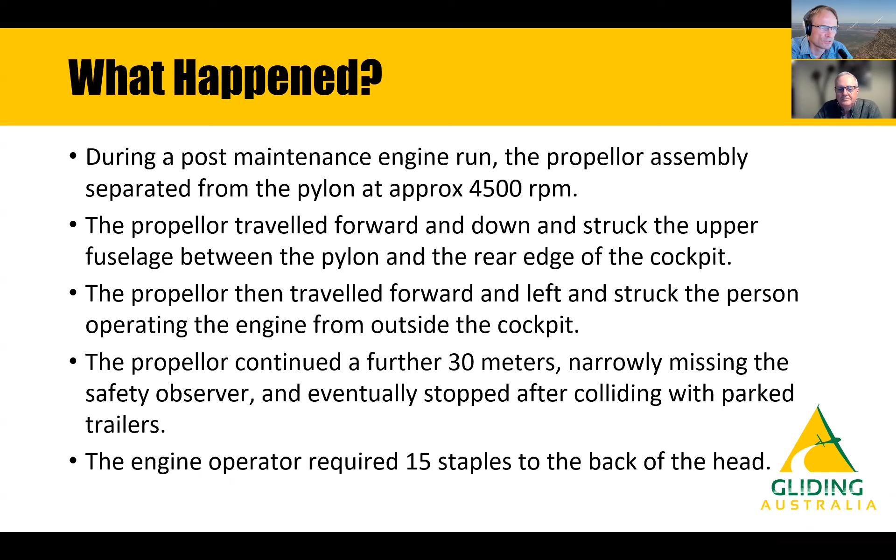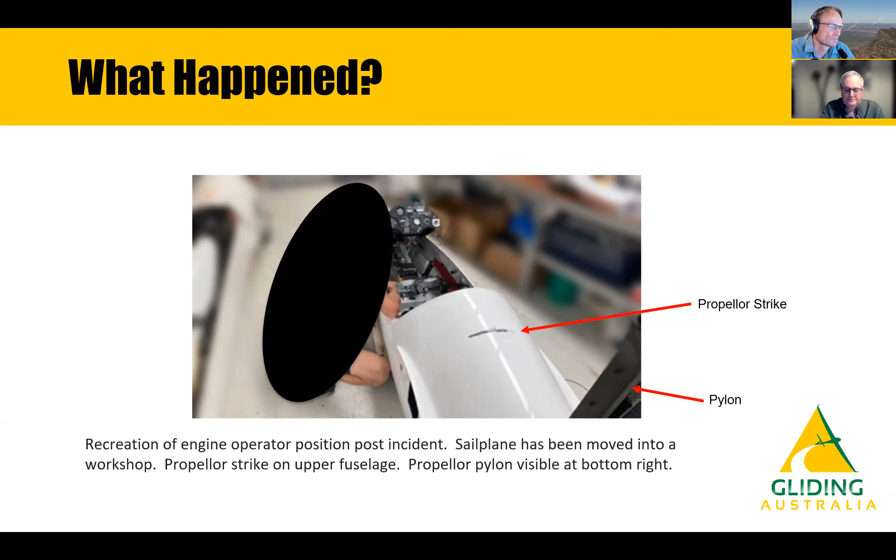So the longer sequence of events.

Not much I can do about the hum at the moment on the microphone, guys, just in the chat.

The propeller had damage from the propeller yoke, which is used to fold the prop during retraction. This is a sailplane where, when the propeller is retracted, the upper blade is folded down over the lower blade, and it has a horseshoe-shaped kind of structure on top of the pylon, which rotates over the prop to fold the propeller blade down. That is the propeller yoke.

The propeller and pulley assembly, including the spindle, I'll use the word hub because that's what's in the manual, which is really the stub axle that the whole pulley propeller assembly spins around, was removed by the owner and assistant. That whole assembly was shipped as one unit by the sailplane owner to Europe for overhaul and repair.

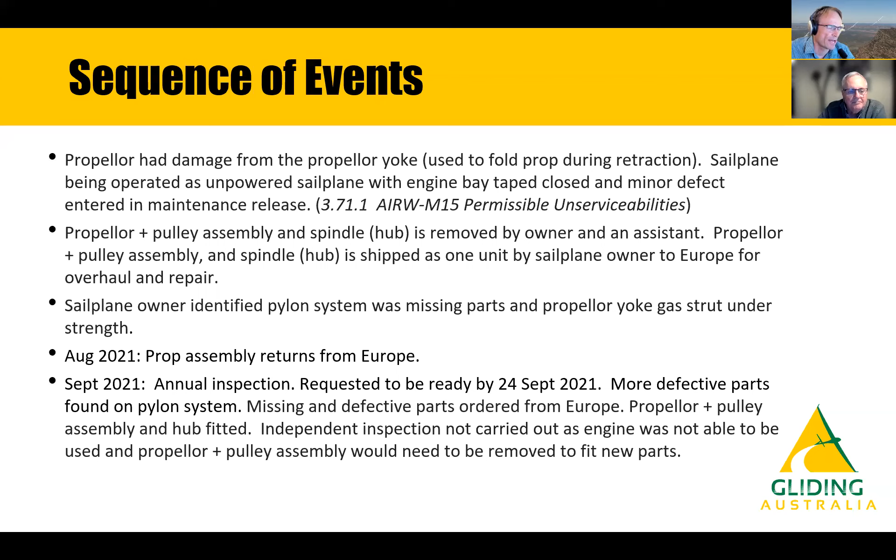So in February, pylon parts arrived. There's a noticeable delay in time here. We've got Christmas in the way. If anyone's tried to organise shipping from anywhere in the world at the moment, you'll all know there's a significant delay in shipping the parts. So there's a significant delay in bits arriving.

So the sailplane gets returned to the hangar to have these replacement parts installed and the engine and pylon system made serviceable. Again, a date was set for delivery. The propeller and pulley and the hub assembly was removed. New parts were fitted and everything was refitted. Independent inspections were carried out.

And on Friday the 11th, there was the first attempt at an engine run, but the engine failed to start. On Monday the 14th, some minor engine maintenance was carried out, and there was a second attempt at the engine run. The engine was started, and when the engine was ramped up to 4,500 RPM, the incident occurred.

The root cause of the problem was the M10 mounting bolt that secures the prop and the pulley assembly to the spindle, or the hub's stub axle that everything spins around on, was not fitted. The thrust from the prop was sufficient to pull the prop and pulley off the spindle.

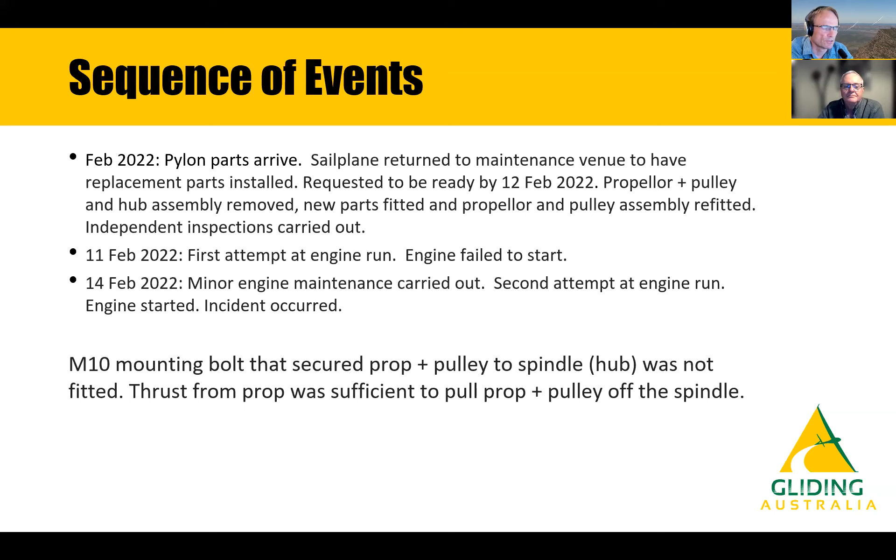So we'll move into the James Reason model, aka the Swiss cheese model. Pretty well known. This one's a slightly modified model from the original James Reason model. So we have a range of hazards or things that could go wrong on the left, and we have a number of barriers in place to try and prevent those hazards from becoming a reality.

And these are normally grouped into engineering controls, administrative controls, behavioural controls, and more recently people have now included an extra slice of cheese after an incident has occurred, which is called a mitigating barrier, or trying to make the consequences of something going wrong less severe.

So some examples of engineering controls would be safer design. In this case, we have a single M10 bolt with a single M10 Nyloc holding the propeller on. It's a single point of failure, not necessarily a great design.

Other engineering controls would be a way of isolating hazardous energy, in this case, spinning blades of death, from people around. So a protective screen or something like that.

We have administrative controls. So these are procedures, manuals, maintenance procedures, and also included in that is some management of change procedures. So when problems get found during the life of the aeroplane, those problems get researched and the maintenance manuals and the procedures involved get updated. It's an important part of the administrative controls, closing some of those holes in the Swiss cheese, which is why I really like having and try and promote a really good SOAR system and a really good defect reporting system, so we can start closing some of these gaps in the Swiss cheese.

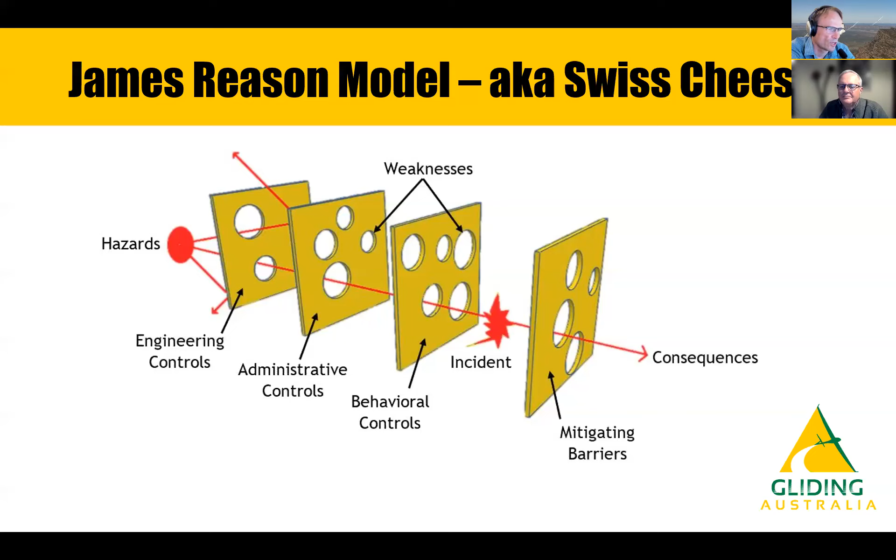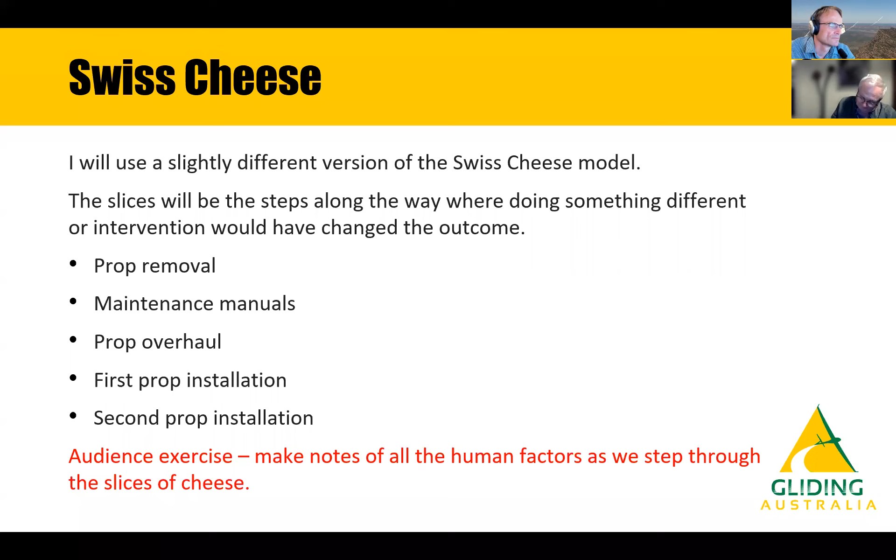So, as I said before, I'm going to be using a slightly different version of the Swiss cheese model. I'll talk about each step along the way where doing something different could have changed the outcome. So, we'll talk about the prop removal and the influence the maintenance manuals had on that step in the procedure. We'll talk about the prop overhaul, and then the first prop installation and the second prop installation. So Swiss cheese slice number 1, the propeller removal.

Rachel, you've got a question. Can we get a copy of that Swiss cheese sent around to everybody, please? The James Reason model? Yep. Okay. Yes, that can be done. An update on the traditional one. Yep, sure. That's Amylus, isn't it? It is. Okay. Not a problem. Thank you. And Amylus, you can take your hand down now too.

So the propeller was removed by people who did not have appropriate airworthiness ratings. So that's a pretty clear breach of MOSP 3 section 10 right from the go. The people who removed the prop were following the maintenance manual, mostly. Some steps at the end were missed. There's poor use of the word hub in the maintenance manual, which caused confusion over what was to be removed and not removed. And I'll talk about that in the next slide.

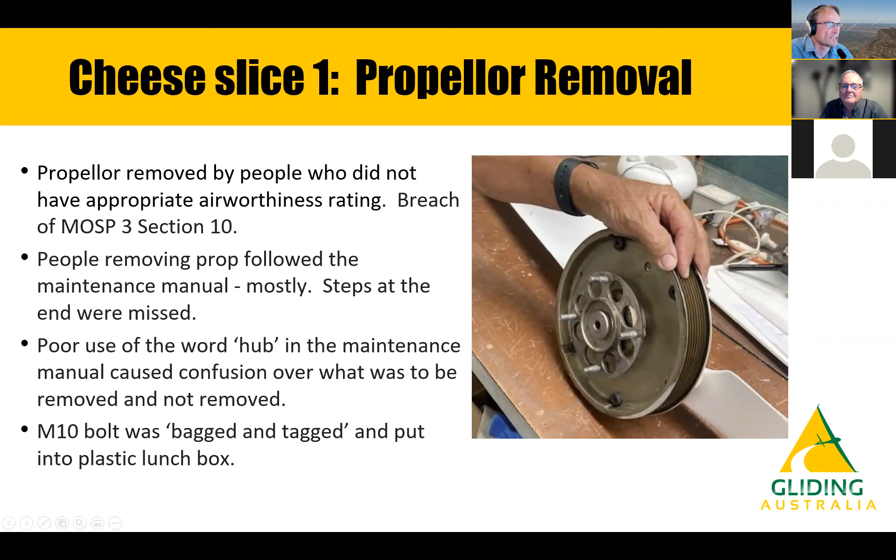Moving on to the maintenance manual, because this is in conjunction with this whole step. The maintenance manual was probably translated from German to English, and you get some interesting translations when that happens. The maintenance manual uses the words prop, propeller, pulley and hub. So from right to left on the photo, you've got the white blades for the propeller, you've got the pulley for the belts, and then you've got the hub.

And what they're referring to in the maintenance manual as the hub is this stub axle or spindle which everything spins around on. Now the propeller manufacturer specifically stated that they wanted the prop, hub and pulley to be together for overhaul. What they were referring to was the propeller and the folding assembly that the blades mount onto and the pulley to be together when it is sent for overhaul.

So you have this confusion created by the use of the different meanings of the word hub between the two requests. The maintenance manual says this is a hub. The propeller manufacturer was talking about the folding mechanism and the blade attachment structure that's on the other side of the pulley. They didn't want the pulley separated. You can see the 4 mounting bolts there. That would then detach the folding mechanism of the propeller blades.

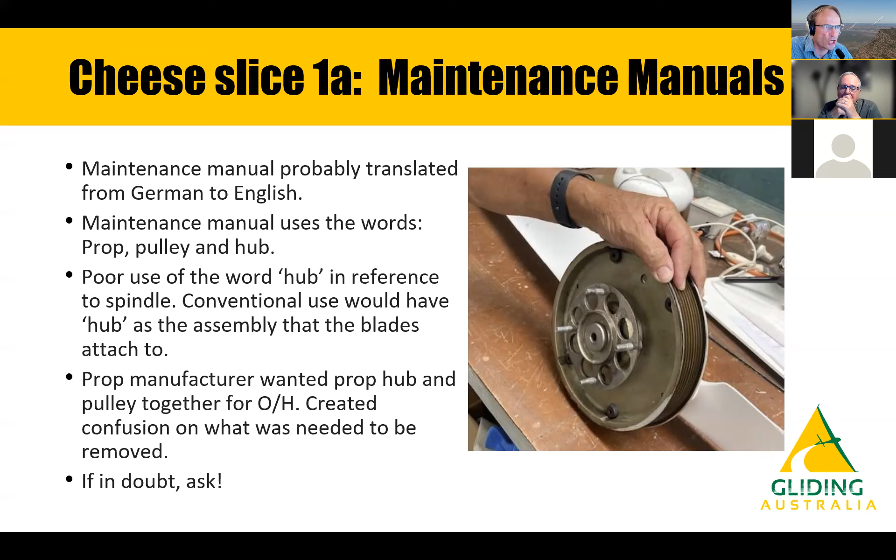So cheese slice number 2, the propeller overhaul. The propeller and pulley with this spindle, stub axle, was sent as one item without the mounting bolt. This was overhauled and repaired at the propeller manufacturer, and it was returned without the M10 mounting bolt being fitted. But it did come with an EASA Form 1 certificate, effectively a maintenance release that was signed off as being serviceable. This Form 1 created the assumption that the entire assembly, as it was presented, returned to Australia, was complete, serviceable and able to be installed as one item.

There would have been a lot of people caught out by this. You get the propeller out of the box and it's pretty obvious that you go and put it on by installing those 4 M8 bolts into the spindle and doing up 4 M8 nylocks or lock nuts on the rear. You would have had to have read the maintenance manual, and this is one of those maintenance manuals that says here's how to remove the prop, and the installation is the reverse of the removal, which I didn't quote. So you would have had to have read the maintenance manual to then realise that there was an M10 bolt missing from this assembly.

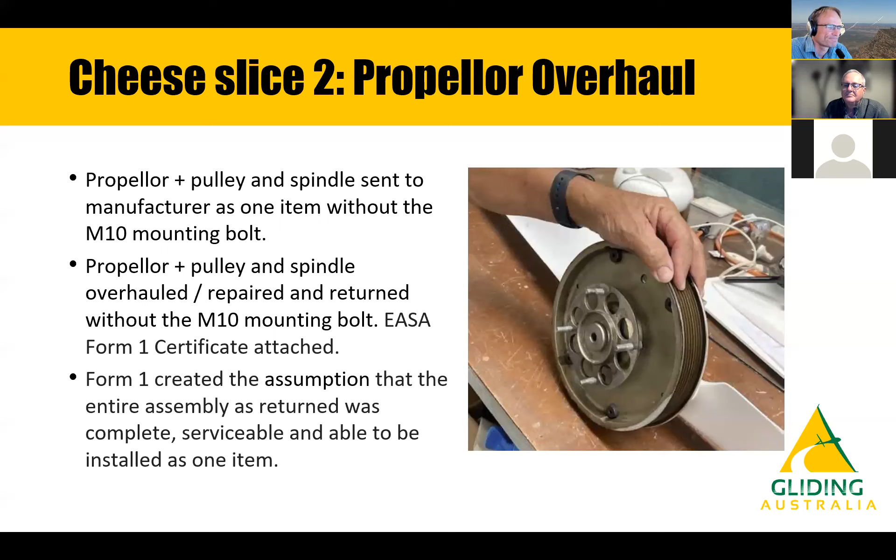Cheese slice number 3, the first propeller installation. Now, the person installing the propeller is different to the person who was taking it off. There was some communication between these people that did clearly state that the M10 mounting bolt was in this plastic lunchbox. The maintenance venue had that lunchbox and the M10 mounting bolt. The M10 mounting bolt is clearly referenced in the maintenance manual.

However, there were more problems found with the pylon system. So there was a decision to simply put the prop back onto the pylon for weight and balance reasons. That way, the aircraft could be used as a pure sailplane without the engine. And again, it was just put in place. Pretty obvious installation. Insert the 4 M8 bolts, put on the nuts, and Bob is your uncle. Now, the people involved with this process were appropriately rated.

Not necessarily completely familiar with this particular system, but had worked on this particular sailplane previously. When I last looked, and this was a couple of years ago, there were 124 different sailplane types on the register. It's probably closer to 130 now, with a few more arrivals, probably pushing around 128. There is no way that I would expect a single person to be completely knowledgeable on every single detail of every single sailplane currently on the register in this country.

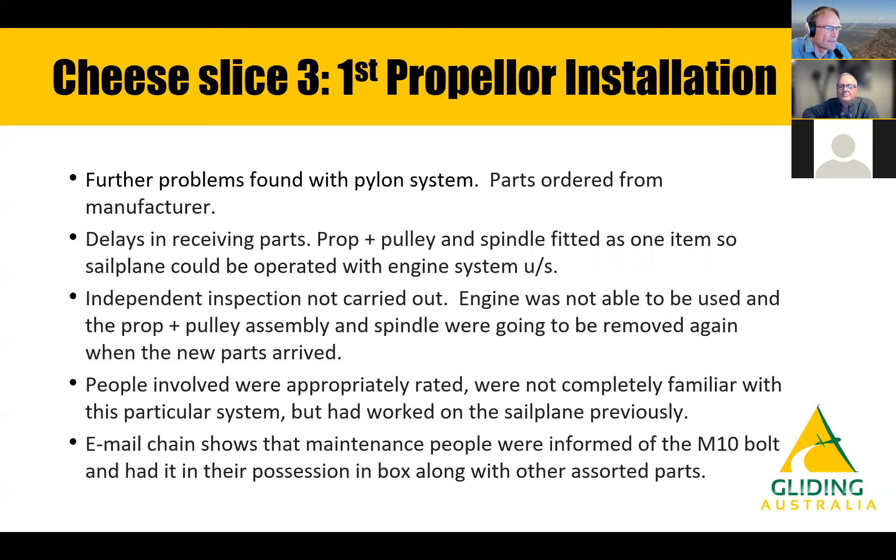However, there's a chain of email messages that shows that the people who were involved were informed of this M10 bolt. They had it in their possession along with other assorted parts. But somewhere along the way, this information got lost, forgotten, omitted, and it may very well have been, we're just going to throw the prop on, and we'll fix it when all the pylon parts arrive back in the country. So the stage is now set. We've got the prop on the aircraft and the M10 mounting bolt is still not fitted.

After 4 months, that's a pretty significant time delay, these new parts arrived. The propeller, everything's pulled off again to fit these pylon bits, and now there's a third person involved who was not involved in either of the first 2 steps. The propeller and pulley and spindle was reinstalled back on the aeroplane, but it was done the same way as the first time, effectively copying the installation as it was done last time, largely copying the same mistake.

There was probably no reference to the manuals. I'm told that at the time of this installation, the maintenance people did not have access to the aircraft maintenance manual. They did the first time. There was an independent check on the refitting of the propeller, but it failed to identify that the M10 mounting bolt was missing. So most likely this independent check was looking for what was done as opposed to looking for what was not done. There wasn't a leftover parts check carried out. At this stage, from what we can work out, the M10 bolt was with the aircraft paperwork, which was separate to the workshop.

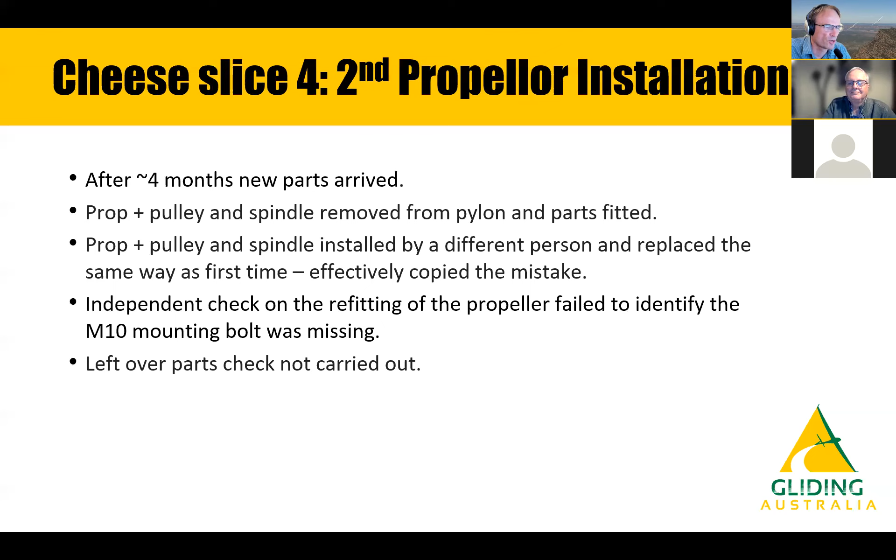So the cheese slice number 5, mitigation. The engine operator was running the engine outside the aircraft. Now, there was absolutely no protection to anyone who was outside the aircraft. Some protection would have been afforded by people being inside the cockpit. Now, up until recently, there was a CAR that said it was actually an illegal act to run the aircraft engine without having someone inside in the command seat.

Now, with that being cancelled and Part 103 in force, it is now actually legal for people to operate the engine from outside the aircraft. This is intended to enable people to hand crank engines to start them and things like that. What you have to do is ensure that the aircraft is appropriately secured so you don't have a runaway aeroplane problem.

The safety person was present. Now, in this case, the safety person did completely the right thing. Unfortunately, the safety person was in a position where they were in the line of fire when this propeller came flying off the aeroplane. So one of the outcomes is going to be that us in GFA land are going to have to review our information that's in the BSE and other manuals about advice on where to be standing and where the danger zones are when doing these engine runs.

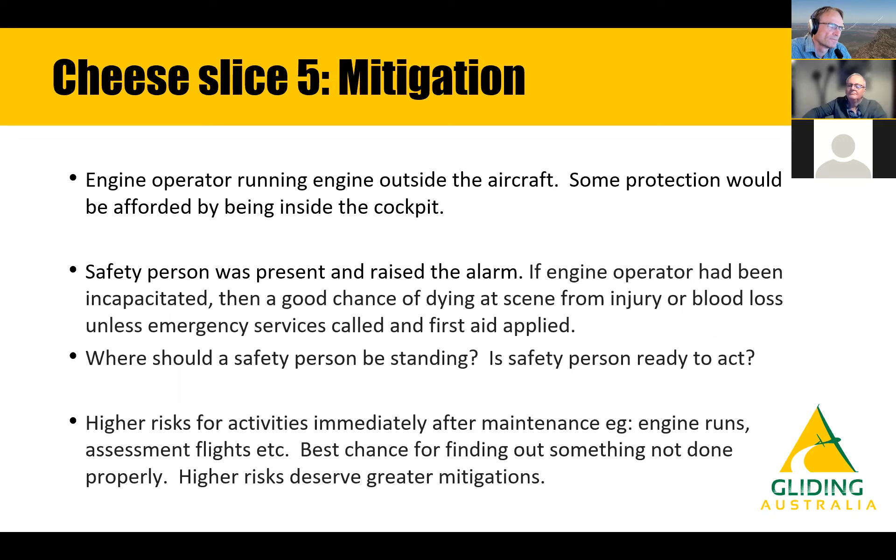So some of the lessons that can be learned here. Human factors. Human capabilities and limitations can significantly impact airworthiness. Well, they can impact a lot of things. So some of the human factors that we've talked about so far. Misinterpretation. Unqualified people doing the work and misunderstanding the intent of the maintenance manual. I can be very critical of many of the maintenance manuals for sailplanes. They lack a lot of details. But as one person has pointed out to me, these manuals are written with the intent of being a guide for experienced people who are qualified to do the job. So they don't necessarily need to spell it out step by step so that anyone can do the job. Now that's a discussion point. At what level do you expect to see the maintenance manuals written?

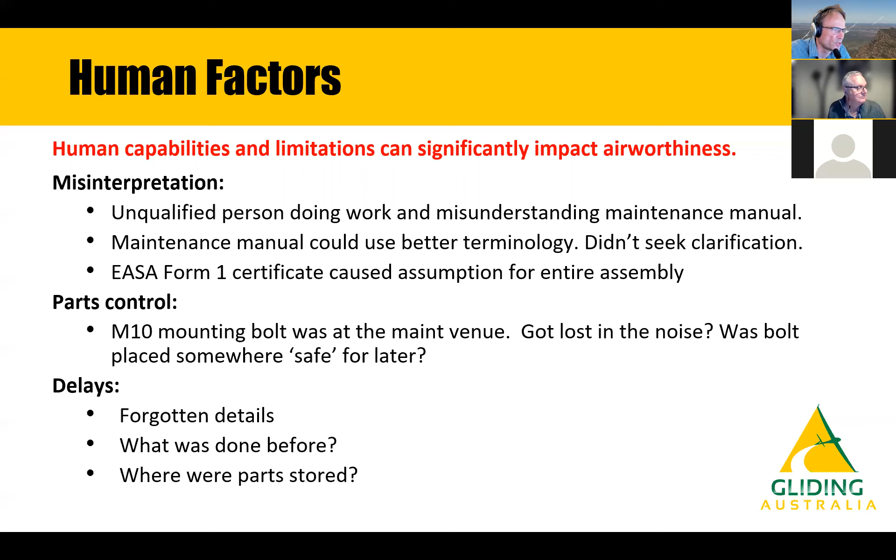Time pressure, that's very common. Happens in everyday life. I had it extensively in my professional career. Everyone will have probably experienced it at some time, and at every single airworthiness course we talk about time pressures and pushing back against people who want something now or want something immediately, putting the load on, encouraging people to work faster, potentially missing critical steps, taking shortcuts, bypassing procedures.

Another big airline fatality that people remember way back, American Airlines Flight 191, it was a DC-10 in May 1979, where the number one engine, the left-hand engine, fell off. And that was due to the maintenance staff taking shortcuts in the engine change procedures. They were trying to save time and money and effort by using a forklift in the engine change procedures. And that ended up stressing particular components to the point where they developed cracks. The crash was actually caused by a hydraulics failure, but when you have the entire hydraulic fluid pumped overboard, it's only a matter of time before something awful happens to the airplane.

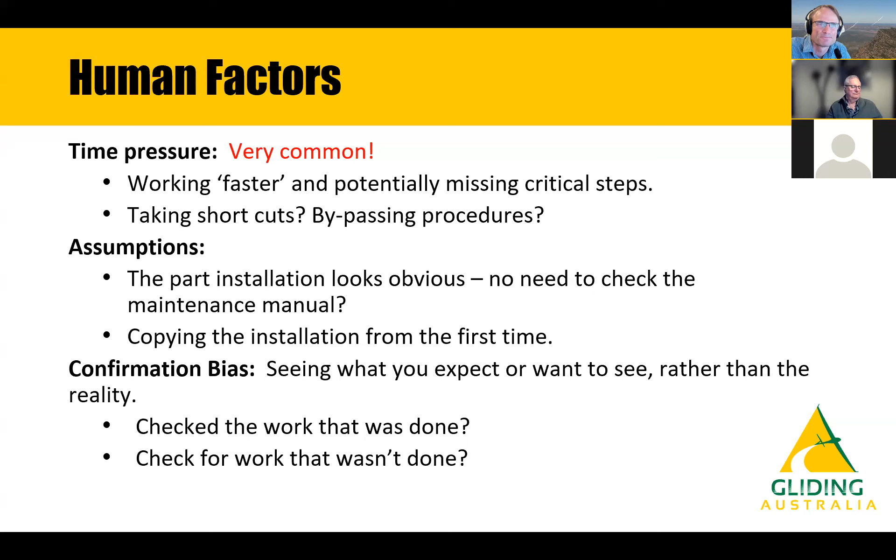So checking for correct assembly and function, control interference, are all the fasteners in safety, are there foreign objects. The one step that isn't necessarily covered in checking for correct assembly is, has anything been left out? That is an additional step, as opposed to is everything done up properly as it was installed. What's been left out? What isn't there?

One of the stories that's come out of this, and there's another little investigation going on behind the scenes as to how this aircraft got into this state in the first place, was there were components on the pylon that were missing. And there are literally open bolt holes where stuff was supposed to be secured, but just wasn't there. And why this didn't raise questions when it should have: why do we have vacant bolt holes? What's supposed to be there?

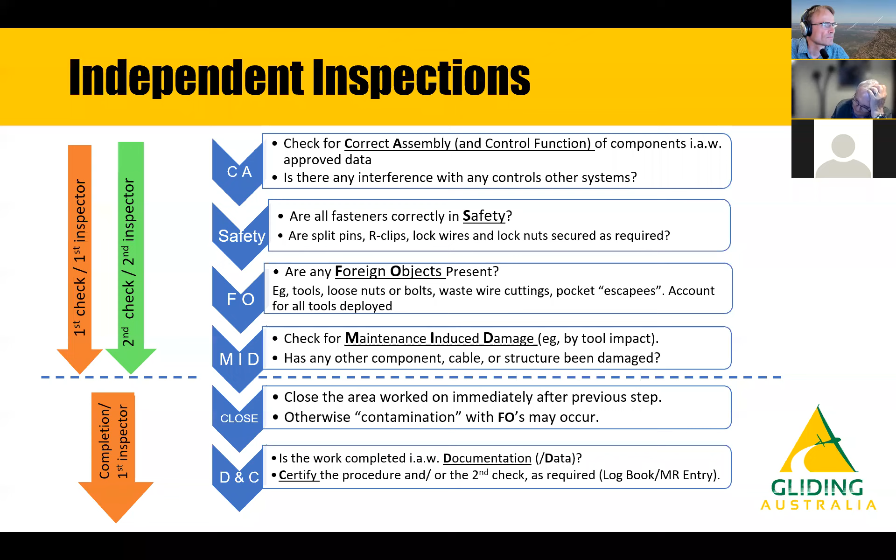So you put the entry into the logbook, it's signed, the second person signs it up, and you're right to go. And this leads into having access to the applicable data during the check procedure.

If you're an annual inspector or doing an independent check on someone's work, in both cases, or even before when you're doing work, if you do not have access to the maintenance manual, you should feel free to refuse to do the job. Because at the end of the day, you'll be signing up that you've done this in accordance with the applicable data. If you don't have it, how can you check to say that you've signed up to that state?

The person doing the inspection needs to have an idea of what they're doing, what they should be looking at. They need to have access to the maintenance manual or the approved data, the approved instruction. And in this case, if you're doing a repair, you should be looking at the repair instruction. Explain what was worked on, what needs to be in safety, give them a full briefing, etc.

The checker must go in with the idea that there is something wrong with the aeroplane and they need to find it. Trusting Bill Bloggs because he's a good bloke and always does good work and you just need to have a quick squiz with a torch and not even bother with the mirror is a pretty bad assumption. Checking all the hidden areas, places where you can't see, using a mirror and appropriate illumination and a torch.

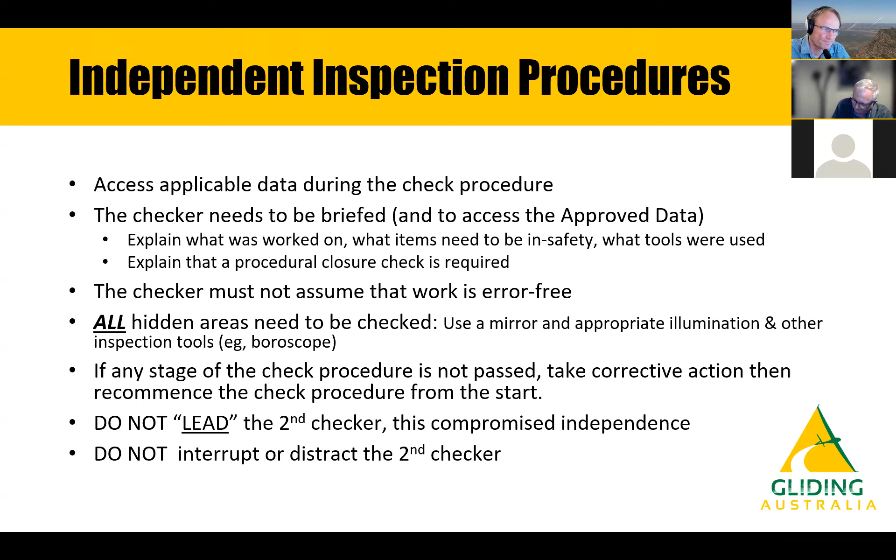That's it from me. I'll open the floor up to people who've got any questions, so you can stick your hand up using the controls or start typing away like crazy on the Q&A panel.

Yeah, looking at one of the comments there, I presume it's Scott, having previously stood in front of a glider holding the nose down for assisting the wheel brake and preventing the tail lifting up. So yes, there's been a fair number of horror stories relayed to me in the last couple of weeks involving aircraft doing engine runs without the wings on, including aircraft that have rolled over in the fuselage cradle, causing propeller strikes, aircraft that have lifted their tail up because there's not a lot of mass behind the centre of gravity, and the propeller has had enough thrust to lift the tail up and start tipping the aircraft over, or the aircraft has started rolling forwards.